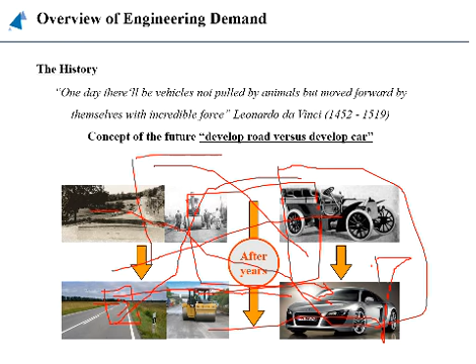So in our transportation engineering, these are the people basically who are related to computer science or electrical engineering or data structures, how to communicate the information from vehicles to the road. But these people have enough knowledge of the road structure, how to design a road, how to analyze the road structure for traffic loading, but they don't know how to transmit the data which is generated here, to create a communication between these two things.

So basically there is a very large gap, and the future road believes in this: that if we need to develop cars, we also need to develop roads. So our lecture is about how we can transform our roads from traditional to smart roads. Smart roads will be roads that have the capacity to communicate with the vehicles. They will have some real-time sensing functions.

So in this lecture we will basically talk about how we can make our roads sensible. Just like our human body has five senses, we can feel the change in temperature, like hot and cold. We can see things, we can hear things, we have sensing properties. But our roads, our concrete materials, don't have such functions.

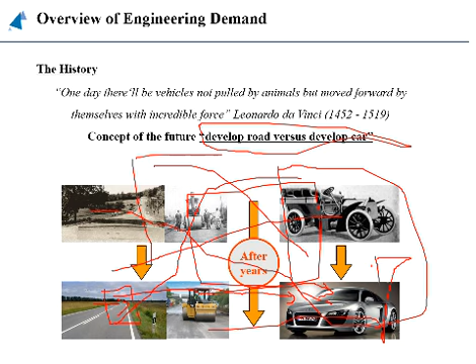So what is basically the problem, and what is the practical relevance? The problem basically arises from the fact that we have a traditional model of road construction. Roads are subjected to traffic concentration and climate change, which is the most important factor nowadays. In Pakistan, we see that recently, because of climate change, we have had so many floods and sudden floods. There are so many changes in temperature, and very high temperatures in Pakistan.

All these things combined lead to structural failure in the roads, and in turn we have very huge costs and losses. The other thing is that there is a complex interaction between materials and the environment: how the environment affects these materials, and how it can lead to these failures. So first of all, we need to understand the interaction between the material and the environment, how temperature affects our road materials. For this we need to do research, and a lot of research has been done by researchers in the past.

But what is the gap? The gap is that we don't have advanced design and condition assessment approaches. Once cracks appear in the road, the construction personnel come, do the condition assessment, and do some repairs. We don't have real-time condition assessment approaches.

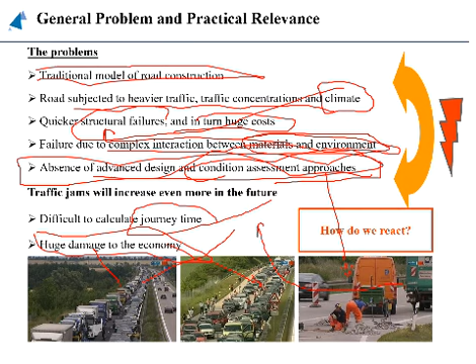So just like we talked about condition assessment in the laboratory, if we look here, these are basically the developments in laboratory work. Initially, the concept was that we took a core from the road or the mixes to the laboratory and tested it for mechanical performance. After this came CT scanning. It is basically X-ray: we took the sample to the laboratory, X-rayed it, and then found the cracks.

After this came sensors. They need to be inserted in the roads, and they tell us about what is happening in the road. But all these technologies are externally applied to the roads. A sensor is basically not a part of the road. We need to insert a sensor in the road, and although it acts like veins in the body, it is still not an inherent part of the road structure. So people nowadays are focusing on this, like we see here. They are trying to make concrete act as a self-sensor.

They need to put some materials components inside the concrete mixes, because of which the concrete will be able to feel the force, the humidity, and temperature changes. In turn, it will give a signal, just like a human mind, creating signals and forwarding them to some operating and processing system, just like a human mind. Then we need to process this data.

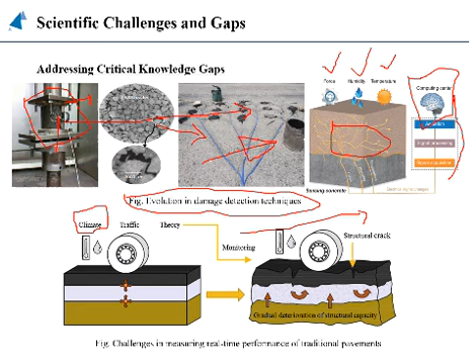That how the variation in temperature, the humidity, the freeze-thaw cycles leads to these things, which is basically called real-time monitoring - how we can measure and determine the deterioration of pavements in real time, so that we could avoid these things.

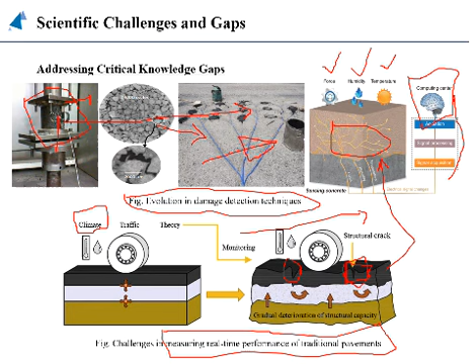So to solve this issue, we need to make a concrete like this, which could feel the traffic load and the climate change, and in turn provide some signals, so that premature damage of such type of materials could be detected in real time, and accordingly we could adopt some maintenance and repair technologies. In case of our asphalt mixture, as I told you, in this lecture we will talk about the asphalt materials.

Our asphalt concrete has a very heterogeneous composition, meaning it is composed of different materials. On one side we have aggregates, on the other we have asphalt or bitumen, and we have some filler, and we have some fibers, which are the additives.

Among all these things, this is very sensitive to environmental variation. Like we see here, at 60 degrees centigrade in 1 hour, this is its state. At 25 degrees for 1 hour it is like this, and for 10 hours it is like this. This basically shows the temperature shift behavior of the asphalt binder, showing how with increase of temperature it changed its status.

It is a viscoelastic material. Viscoelastic means that at a fixed temperature, sometimes it acts like a viscous material, and at the same time it acts like an elastic material. So it becomes very difficult to determine the behavior of this type of material.

So in our pavement engineering, the whole attention is given to this thing, which is called the asphalt material. In many countries the composition of this material has been modified, like in China and some other developed countries, to avoid this behavior. But unfortunately, in our country, we are still using the same conventional asphalt, which is incapable of withstanding the recent temperature variation and traffic loading.

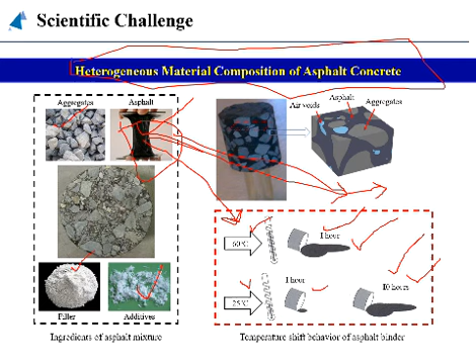So in our asphalt concrete and asphalt material, the main attention is paid to this material and its behavior - how it changes its internal condition with changes of temperature. This is the only thing responsible for the deterioration of our pavements and roads. So these are basically the functions, how our pavement structures respond to the traffic loading and the thermal cycling.

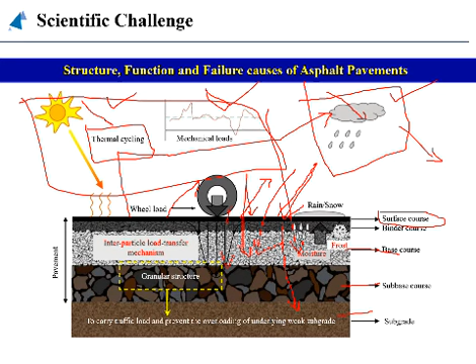This is how the durability and serviceability of asphalt pavements gradually deteriorates with time. For example, this is the vehicle, and these are the stresses and strains imposed because of loading and unloading, which leads to this type of rutting, which normally occurs in Pakistan on the roads.

It occurs because of high temperature. These are the cracks, which normally occur in low temperature regions, and also in Pakistan. These are fatigue cracks, meaning they occur because of constant loading, and these are moisture damages.

In Pakistan, we also have this damage, but compared to this one, we frequently see this type of damage on the road. This type of damage normally occurs in China, where 75% of the country is exposed to large temperature variation, and there is so much rain.

So these are basically the general failure modes that occur in the pavement structure because of environmental conditions and traffic loading. This relaxation during loading and unloading leads to gradual aging of the pavement.

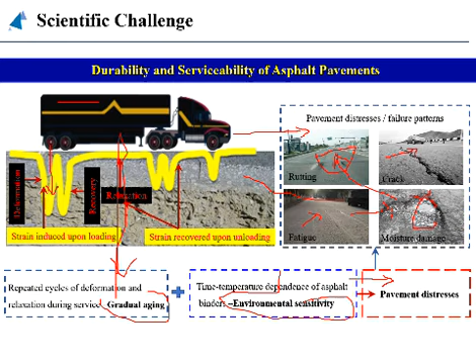As I discussed, the pavement structure is subjected to this type of damage. So how can we overcome these things? What we need to do next - these are problems we've seen for a very long time on our roads, which are subjected to traffic and environmental changes. So how can we reduce these things?

For this, we need to adopt a new construction philosophy. A new road construction philosophy is needed. Why do we need new construction? Because, as I told you, this bitumen or asphalt is even inferior to simple polymers with regard to its thermal and mechanical properties.

As I discussed in the previous lecture, asphalt or bitumen in Pakistan is normally the neat bitumen which comes from the Attock refinery or similar sources. It is petroleum based. So this neat or virgin asphalt matter is even inferior to the polymer.

In China, people are using plastic or SBS, which is a specific type of polymer. They put it in the asphalt binder, modify the internal composition, and make it meet service requirements. So in our country, we should also pay attention to this.

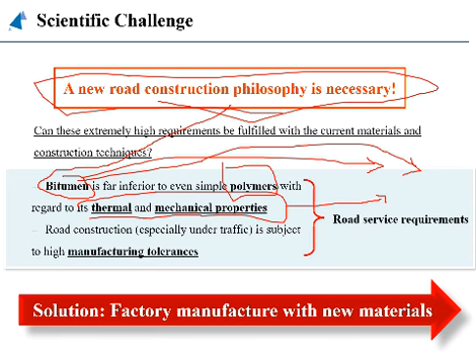For example, if people in transportation and pavement engineering want to do research, they can also modify this by adding polymers, plastic, or other materials, so that its mechanical and thermal performance can be improved compared to conventional asphalt binder.

So how can we develop new materials? Our asphalt is very weak in resistance to temperature, thermal stresses, and mechanical loads. So what we need to do now is develop new materials based upon these considerations.

Development of new materials, which I did in my PhD research. What I did to avoid these things, these cracks, this rutting, this water damage, was modify the composition of the conventional mixers.

I added some type of conductive additives in the asphalt mixer, and what I did was create a piezo-resistive behavior to enable self-monitoring of the material.

This type of mixer was different from the conventional mixer because conventional mixer just gave me the mechanical performance. But this type of mixer, when I added some fibers and conductive additives into the conventional mixer, I modified its internal composition. So what did this type of mixer perform for me?

In addition to the mechanical performance, it also gives me information about its internal composition through changes in electrical resistance, which is basically called FCR. FCR denotes the fractional changes in electrical resistance, which was a measure of the self-monitoring performance of the asphalt concrete.

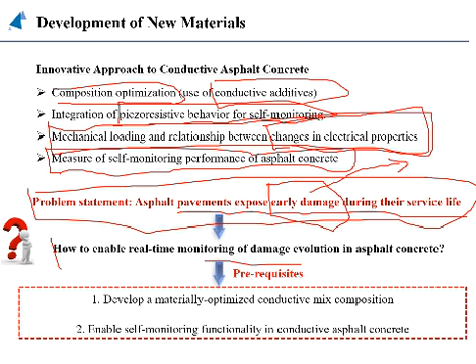There were basically two prerequisites for me. One was how can I develop an optimized conductive mix composition, and second was how can I impart self-sensing functionality in this concrete.

This thing was basically the most challenging thing for me. First of all, I added some conductive additives in the mixer. I used different types of compositions, but to optimize the composition was a very difficult job. Optimization means it should give me optimized properties in terms of both the mechanical and the electrical properties.

Sometimes when we put additives, they negatively affect the mechanical performance, although they increase the electrical properties of the material. So in my case, I think this is the most challenging job, how can we get the optimized conductive mix composition. Once this composition is achieved, this thing becomes possible.

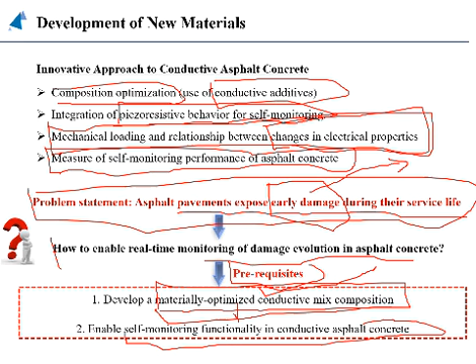So this was basically the idea of how I modified the mixer composition. This is the conventional mixer. These are the aggregates, these are the voids or spaces, and the asphalt binder is basically here.

So what I did, I put fibers in. These red shapes basically show the fibers, carbon fibers, which reinforced the mixer.

So what did it do for me? When I applied loading and there were some cracks generating in the mixer, these fibers basically reinforced and bridged this crack.

So in this experiment, I applied tensile loading. Then in another experiment, when I applied compressive loading like this, these cracks were recovered like this.

We see in pavement engineering, for example, this is the tire. There are basically two types: this is the tension, and this is the compression. For example, if the mixer is subjected to tensile loading on one side, at the same time it is also subjected to compressive loading on the other.

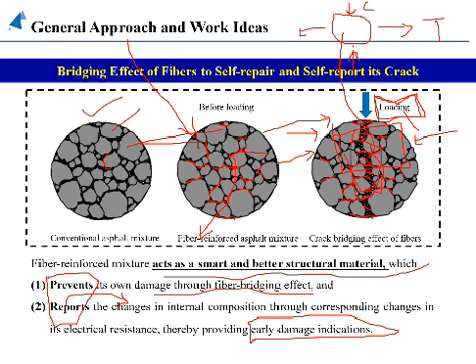So my work was about how we can change the composition of the mixtures. How can we grow from the conventional approaches to new sensing ones that are sustainable, which are resilient. If we look here, the mixture is sustainable. Sustainable means that it maintains its own structure even if it is subjected to the applied loading. So our recent demand is that our road structure should be sustainable. So if we go from this to this, it means that we can achieve the sustainability of road infrastructure. So what is the future vision using these concepts?

The self-sensing or self-monitoring concept: if the mixture has self-sensing properties, it can detect its own damage, it can give information about its internal structural damages. So how can this contribute to our future in transportation engineering? We need to link two visions here. One is that we need to prepare surface layers with optimal performance characteristics and long service life. This is the main thing.

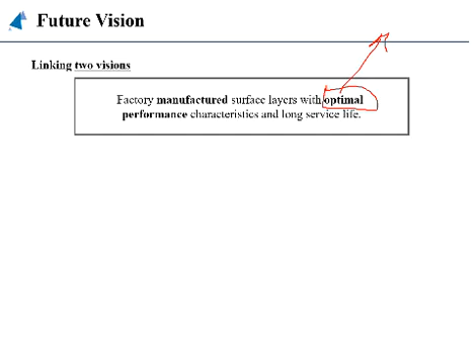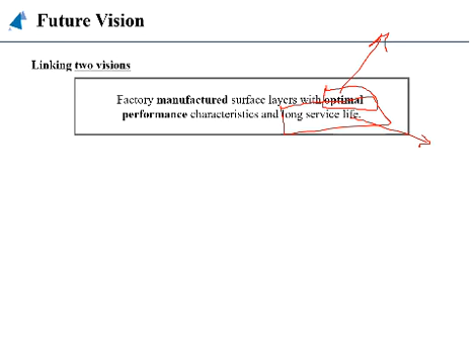Just like I talked about, this was the most difficult to achieve, to give us properties that are best in terms of mechanical performance and electrical performance. And how can these lead to longer service life? Longer service life means that the road material or the mixture should be sustainable, resilient. It means that even if it is subjected to damage, with the passage of time, it will have the capacity to recover from the same damage. So this was the first vision.

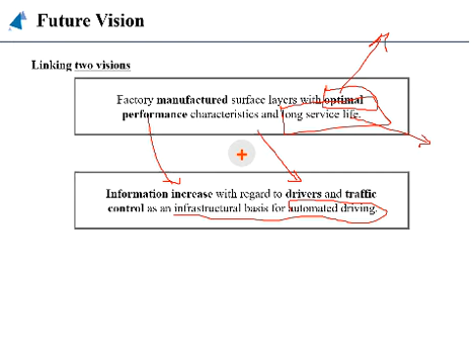The second vision was that here we need to link this with this: information increase with regard to drivers and traffic control as the infrastructural basis for automated driving. So this basically helps us in achieving automated driving. Because if you look at the recent developments, the roads have no sensing capability. Even if we put sensors in the vehicles or in the cars, they can be very sensitive to environmental changes. But on the other hand, our roads have no sensing properties. So by imparting self-sensing properties in the road, this can be realized.

And for this, our road should be sensitive and materially optimized. Sensitive means that it should act like a sensor. It should interact with the vehicles. And second, the most important, it will be materially optimized. Optimized means that it will have a longer service life. So this is basically the future concept on which people are focusing: how can we change the roads from conventional to other roads which could generate some revenues in addition to just carrying the traffic load.

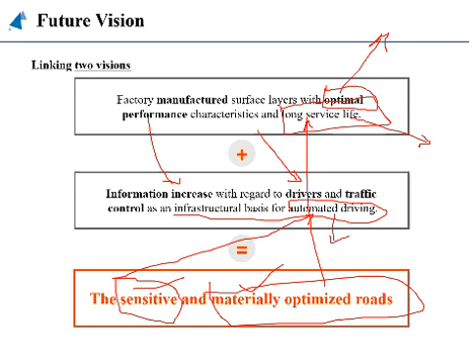We all know that our roads are used for carrying the traffic load, and we have not seen any other advantages that we have got from the roads, although roads cover a large area of a country or a city in every country. So these can be the research fields for the new concept of roads. The first one will be structural engineering, how can we improve the structural performance of the road. The second can be detection, how it helps us in structural health monitoring or traffic monitoring.

The third can be communication, how it helps us to develop communication between the road and the vehicle. And the last one can be energy conversion or energy harvesting. In many countries, people have worked on this, in Japan, in China too, and in other developed countries, researchers are getting energy from the roads.

This communication is also okay in some countries, but it is only limited to the people in electrical engineering, data structures, and computer science. They know how to enable communication on the road, but they are basically unfamiliar with these things. The main thing here is how the traffic loads are distributed from here to here, and how actually the road behaves here.

So for this, what we are doing in our work is we make this surface layer a sensitive layer. This layer will act like a sensor itself. So what damages occur here because of these things? All these variations and transmission of these stresses and strains will be shown to us like this in terms of some signals.

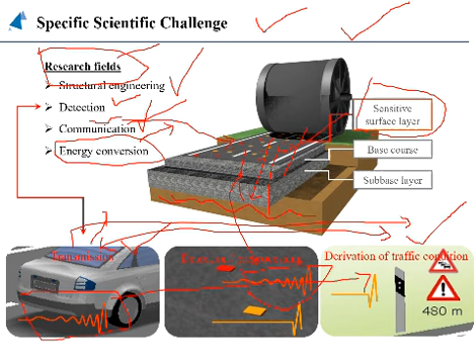So this work of ours is basically smart sensing or self-monitoring. It will enable us to measure the traffic flow, and also to determine what is happening inside the pavement structure because of this traffic loading. So this is basically how the information from here can be transmitted to these people.

In this, we first of all need to develop new conductive materials. Then testing of self-monitoring asphalt under diverse conditions. Diverse means it should include both traffic loading and environmental conditions, how the road is affected because of climate change. For this, we need to do field testing. We need to collect data, and then we can perform the real-time monitoring analysis.

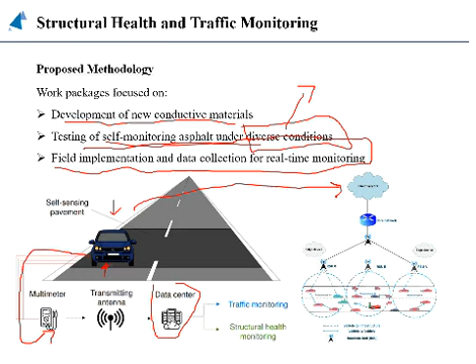This is the generic view of how a vehicle comes on the road. From here, there will be interaction between the road and the vehicle. The data will be collected first of all by the multimeter. Then it will be transmitted to the transmitting antenna. From here it will go to the data center, and then it will decide how we can use this data for traffic monitoring and for structural health monitoring.

Here we need to identify some thresholds, like traffic speed. We could say the traffic speed should be between 40 to 60 kilometers per hour or something like this. Now, if this vehicle's speed exceeds 60, it means that here we will get the signals, and this signal will be transmitted to this thing.

So this is the concept of how we can use the smart sensing, the smart intrinsic ability of the road, to make the traffic flow smooth. How can we enable the roads to detect their own damage, and how can we go from conventional methods to sustainable and resilient methods that could help us in developing smart and sustainable road infrastructure.

So as I told earlier, there is still a gap here. For example, transportation pavement engineers have a very good idea of how the stresses are transmitted because of the vehicle, the sun and other things, but they have very little idea of these things, because they don't know data science and data structures, how to transmit signals and how to optimize these signals. But on the other side, the people from data science know these things.

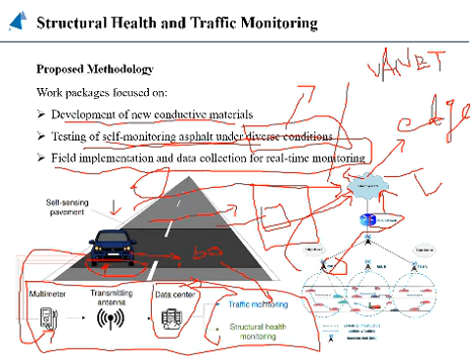So this is a new technology, but we need to reduce the gap between the people here and the people here, so that our transportation infrastructure or our roads could be efficiently utilized for these properties, for structural health monitoring, for traffic monitoring.

So in this lecture, these are the gaps, the things upon which we can develop new knowledge, new techniques, and how can we use these shortcomings to develop new sensing technology, new roads, and how can we further this research in our master's, bachelor's or PhD.

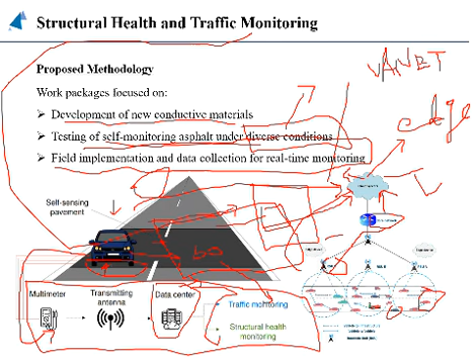But there are also some drawbacks or limitations. This includes what will be the durability of this material in real world applications. The second one is the challenge of integrating with the existing infrastructure. Either we need to develop a new infrastructure, or we can insert these techniques in the already existing infrastructure, because our existing infrastructure is in critical stages, and we have no very good technology to determine the criticality of these infrastructures.

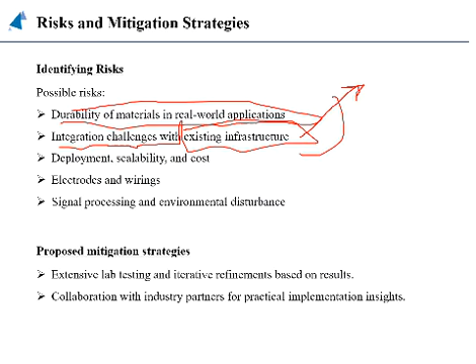After this, we have deployment, scalability, and cost. So these are the issues. And in addition, we have electrodes and wiring systems: how can we do this, whether they will be affected by environmental disturbance, and how can we process the signals which will be generated by the vehicles, collected by the multimeter and transmitted to the data center.

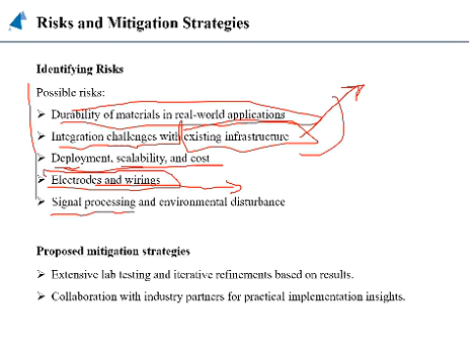So these are basically some types of risks. These are also some gaps. We can work on these things to mitigate these risks and problems. So what can we do? We need to do extensive lab testing and iterative refinement based on the results, so we can optimize the results we get. And we need collaboration with industry partners for practical implementation of these insights.

So we give our own idea, but there may be some challenges which we discussed, like deployment, scalability, cost, how can we process the signals. For this, we can do extensive lab testing, refine the results, and collaborate with the industry. So these are all the gaps upon which we can develop new knowledge. We can get new results. Maybe the results are good or not, but still we can get some idea of what is happening.

So in my view, based upon my previous experience, these are some gaps which I concisely presented in some slides for you. So students who are in bachelor's or master's, or doing PhD, can start some work on this or do some collaboration.

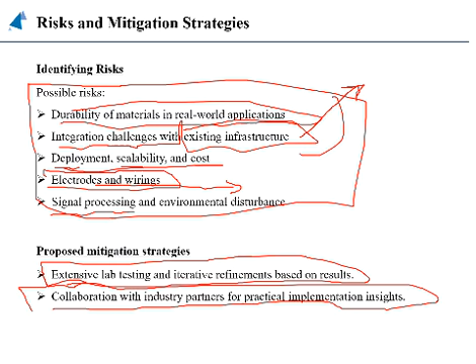I hope this lecture will be very useful for you, because if we compare these things with the conventional things, you can get much knowledge of what is actually happening and what needs to be done, because in our country, every early career researcher is in search of how to find a gap for their study, from where to start. So I hope and believe that this lecture will help you a lot.